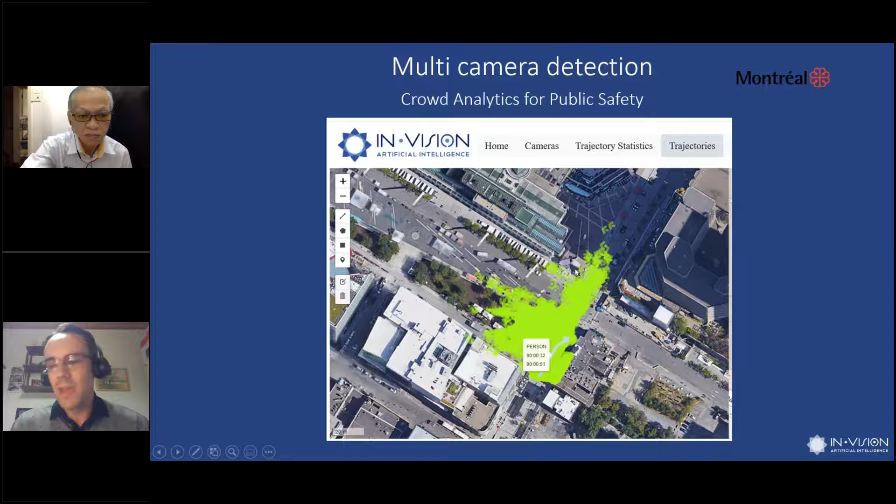We're also working on adding detection of face masks, for example, so that's great for public safety. And we're also detecting hazards in the future, like fire and things like that. That's a top view of the interface we're working on, so that gives us a heat map of where people are in that area, and we're developing the user interface. Just wanted to show you a little example.

Almost there. So the roadside unit, that's the first prototype. Now we have smaller versions, but basically it looks like that. It's taking basically a few views when we detect a vehicle. We have some infrared panels to help illuminate the people in the car.

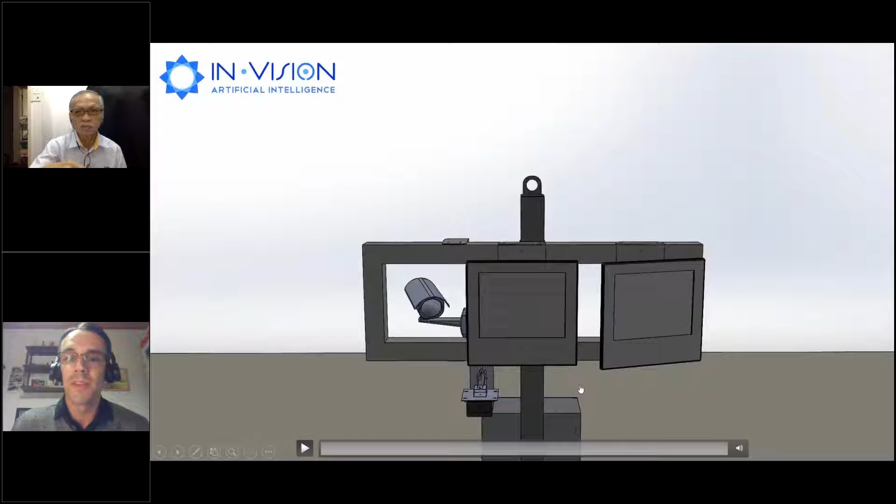And the way it works, I'll show you in this animation: we have a little LiDAR that detects the cars, IR and cameras. Hopefully you can see this little animation. The cars pass through, they're illuminated by the infrared, and we take some pictures.

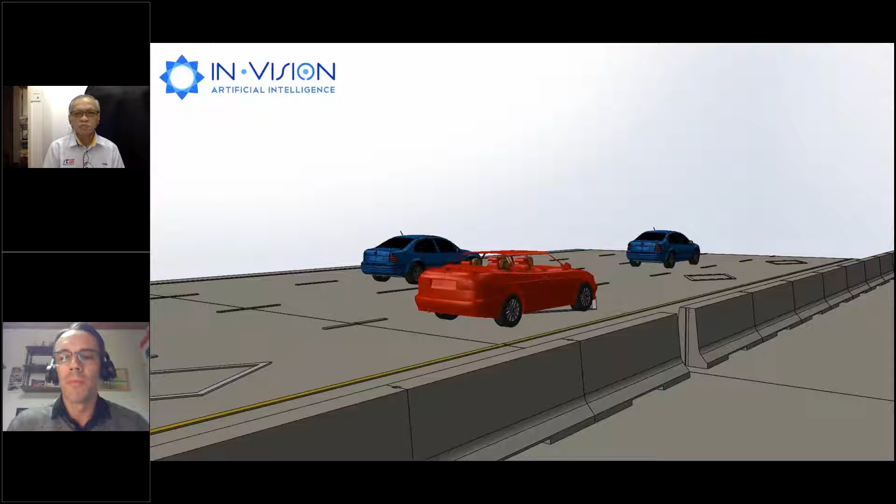That way we're able to count people using artificial intelligence and computer vision. We send statistics to the operator: number of vehicles per day, number of people per vehicle. We're also doing license plate recognition. That's not our product, but we combine it with ours and send all of this information in real time to the operator of the road, for example. So that's the last example.

Yeah, so just a little summary. We're leveraging artificial intelligence and computer vision.

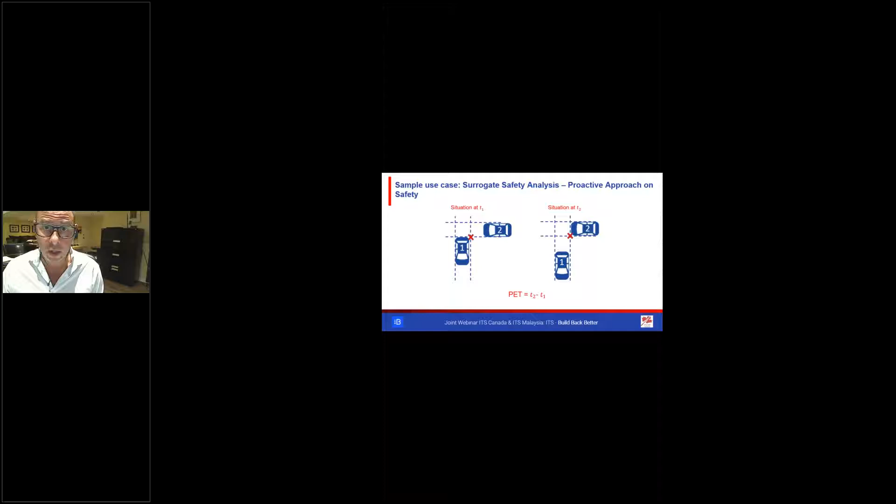It is highly correlated to the risk of accidents. PET values typically less than 2 seconds are classified as critical conflicts, and from 2 to 4 seconds as unsafe conflicts.

This slide is a screenshot of our online interactive heat map, which visualizes conflict data.

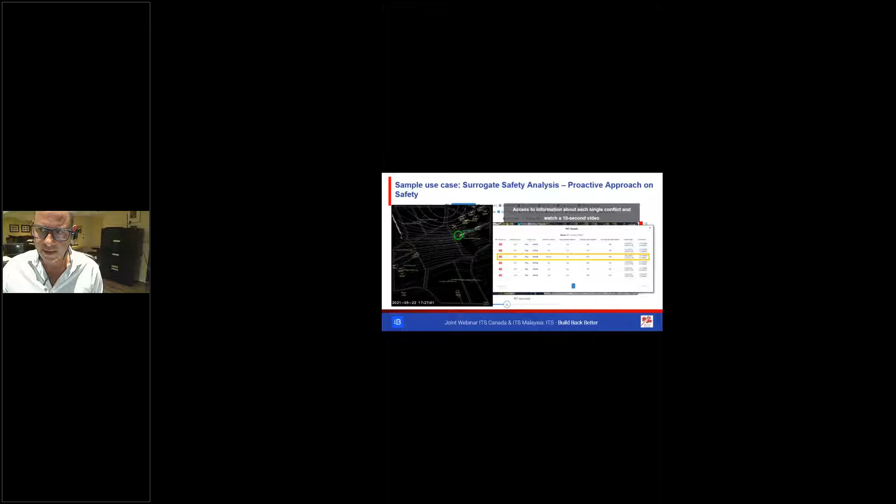Which visualizes conflict data. The user can filter the types of road users, filter the type of turning movements, and filter PET value. Once the filters are adjusted to the user specification, the associated conflicts on the map are represented, and the user can see a video, as you can see here on the left.

We are ready for the future. With 5G connectivity, edge computing, and open APIs, Bluecity has low latency, reliability, and flexibility for future and safe applications. I'll wrap it up there.

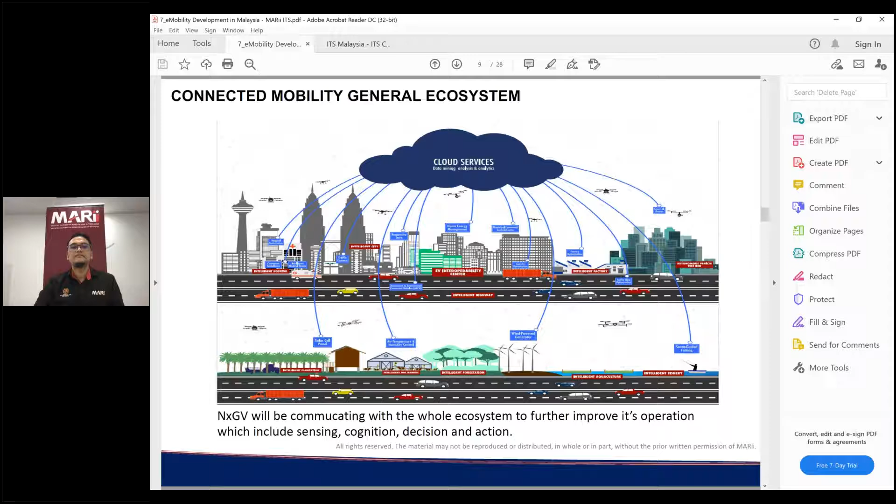What have we defined for NxGV? We have gazetted the Malaysia Standards 2730, the next generation vehicle standards, which is actually the adoption of SAE J3016 and also the World Forum for Harmonization of Vehicle Regulations WP29 guideline into our Malaysia standards.

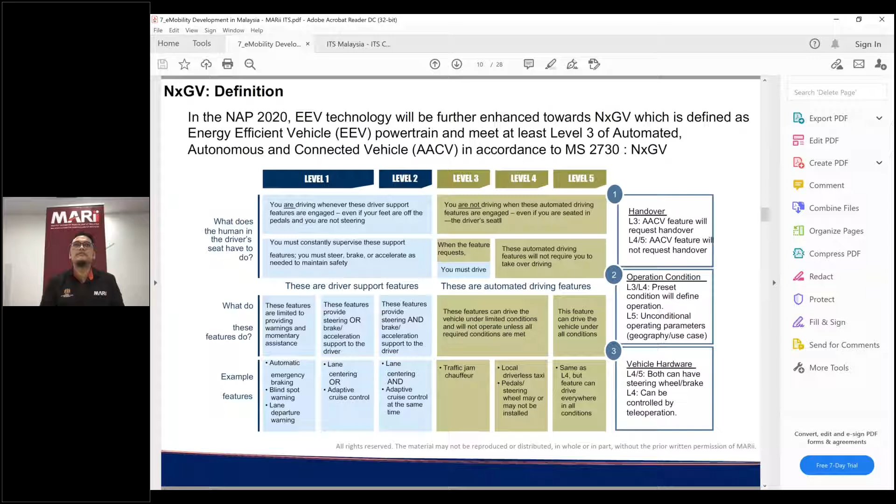In the National Automotive Policy, the energy efficient vehicle technology will be further enhanced towards the NxGV, which is defined as EEV powertrain and meeting at least level 3 of autonomous level. From level 3 onwards, the intervention of the driver is very minimal, and from level 4 onwards it will be fully autonomous vehicles.

This is the key technology development we are focusing on in Malaysia, which consists of the autonomous vehicle platform, the future sensor fusion solution, the data storage and computing, and also testing and validation.

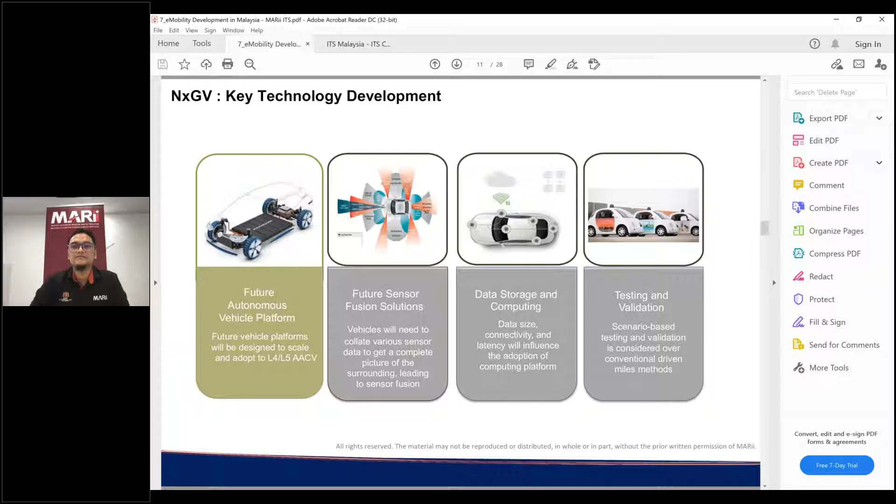To kick off with this technology, we start with the telematics or onboard diagnosis, which becomes the communication port for the vehicle to communicate with the surroundings, infrastructure, and environment. The telematics consists of three independent breakthroughs of modern technology, including the internet, the global positioning system, and also machine-to-machine communication.

This technology is widely used by transportation to deliver businesses and to send out large fleets of vehicles and products. Apart from tracking vehicles, telematics technology is also used for monitoring complete fleets of vehicles and driving behavior, including speeding, idling, fuel usage, and so on.

What we have done in Malaysia is get the primary data from vehicles, deploy pilot projects, and then process the data. We compute it and visualize it in the form of a dashboard, and then use it for development and reporting to the authorities.

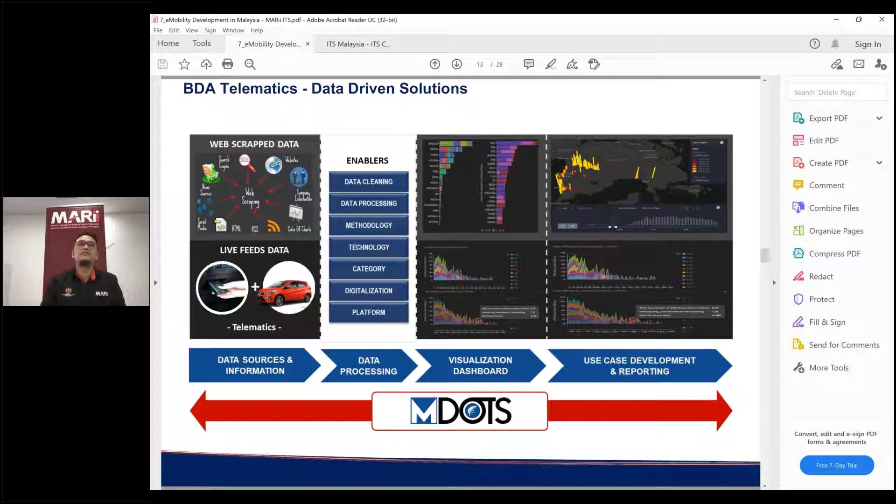I'm going to share the current development status for the electromobility ecosystem improvement in Malaysia.

To attract more investment in next generation vehicles, Industry 4.0, and the development of mobility as a service, the government is giving full exemption for import and excise duty for electric vehicles and hybrid cars. This is to promote powertrain ecosystem development. For investments related to intelligent transportation systems and the development of mobility as a service, we are also giving corporate tax exemption of up to 10 years, depending on the type of activities done by particular companies.

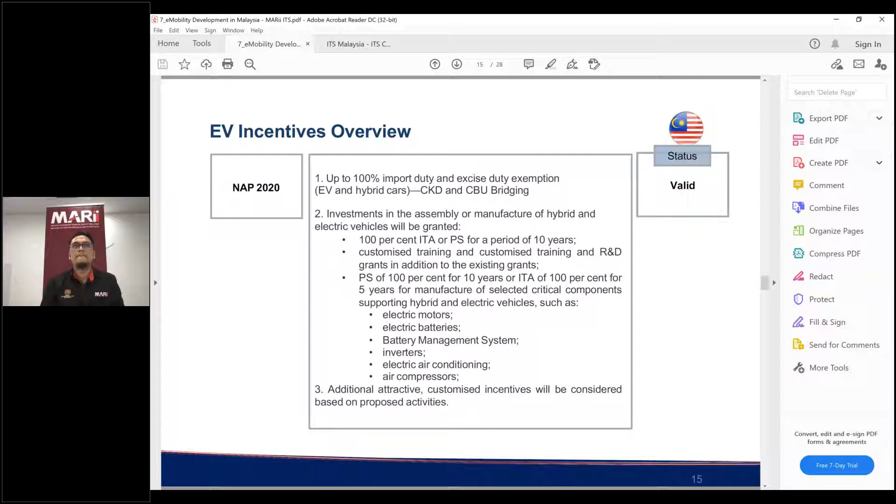Apart from that, we are also harmonizing our Malaysia standards development and domestic regulations by adopting United Nations regulations into our legislation, adopting ISO standards into our legislation, to make sure industry develops products in line with these standards and regulations. This includes requirements for the powertrain system, especially in terms of electric vehicles, battery testing, and so on.

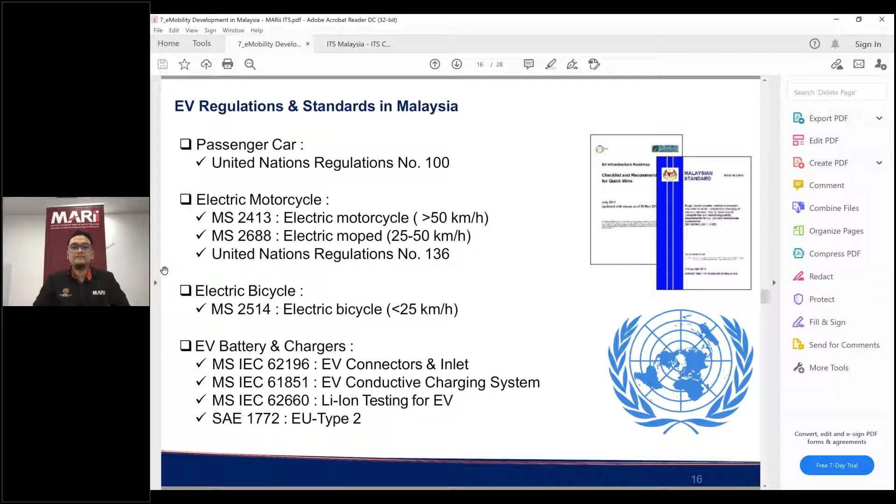For electric vehicle registration, we have recorded around 3,000 vehicles for year 2021, and for hybrid, more than 45,000 units were recorded. We have deployed a lot of electric vehicle pilot projects, including R&D projects under MARii, deployment in certain local authorities' areas such as Putrajaya and Melaka, and leasing projects launched since 2014, which will be expanded in 2020-21 to ensure the sharing concept and leasing mechanism can be realized for mobility as a service.

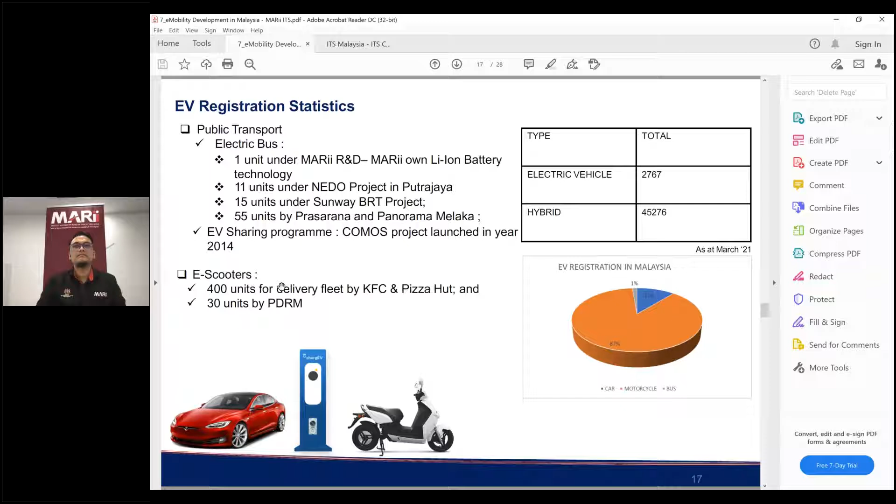This is the record of charging stations currently available in Malaysia. We have recorded more than 326 public EV charging stations, and currently it was recorded that more than 180,000 charging sessions have been leveraged using these public chargers, and it is estimated that more than 1 million kilograms of CO2 emissions have been avoided.

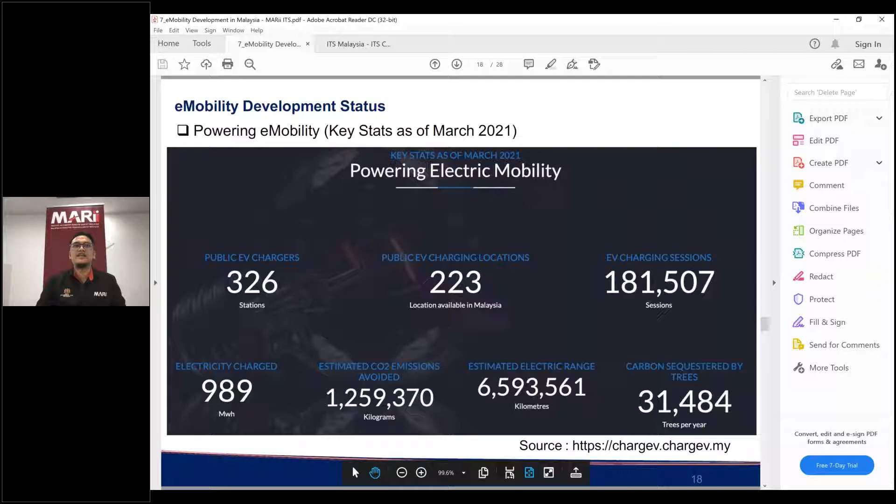As for the telematics project that become the communication port for vehicles in Malaysia, under MARii we have deployed more than 1,000 vehicles to collect data in terms of routes, and we have aggregated the data in terms of which areas have been more in terms of speeding alerts, harsh cornering, and harsh braking. We have compiled the data and given the input to the authorities to formulate better policies.

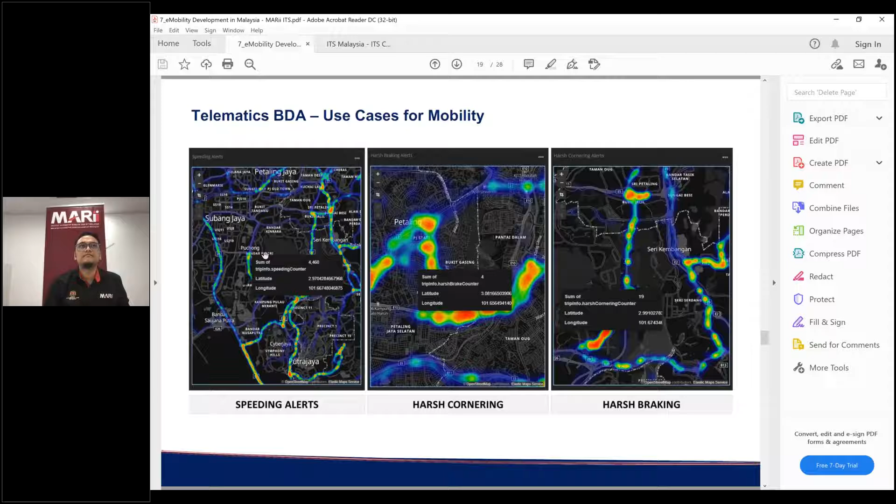We also have allowed autonomous vehicle mixed traffic testing, under the Ministry of Transport guideline with assistance from Futurise. So far we have allowed 2 different routes. The first route has a total distance of 800 meters, with AV trial allowed up to 20 kilometers per hour, focused on parking areas with minimal pedestrian presence. The second route has a total distance of 6.25 kilometers, with speed limit up to 40 kilometers per hour, comprising intersections, road humps, zebra crossings, and traffic lights, under normal free-flow traffic conditions.

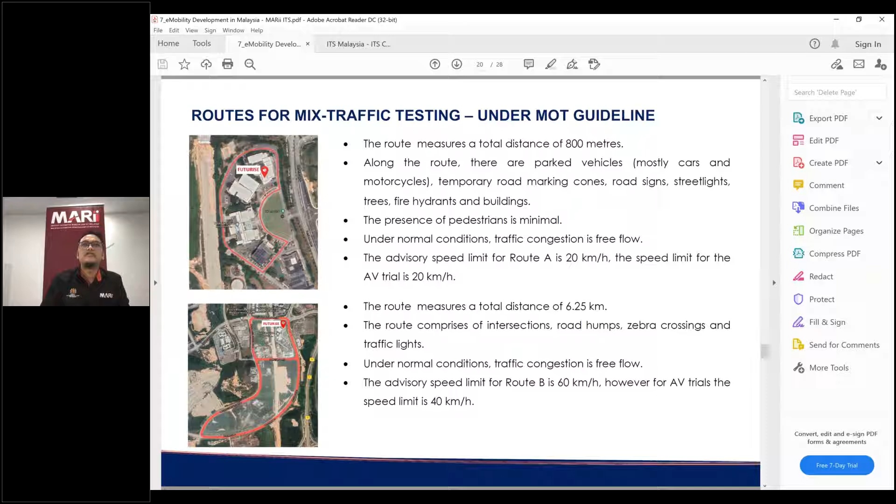So to move forward, we also have strategized the action plan to make sure of continuous expansion and improvement for e-mobility in Malaysia.

The first project is the proof of value concept by localizing the next generation vehicle in Malaysia. Under MARii now, we are developing our own autonomous level 3 technology. We have acquired several LiDAR units and onboard computing for the vehicles, to make sure we can perform our own global positioning system, embed the sensory, safety, control unit, and processing drive unit. We aim to introduce low-cost autonomous vehicles in Malaysia to attract more market penetration.

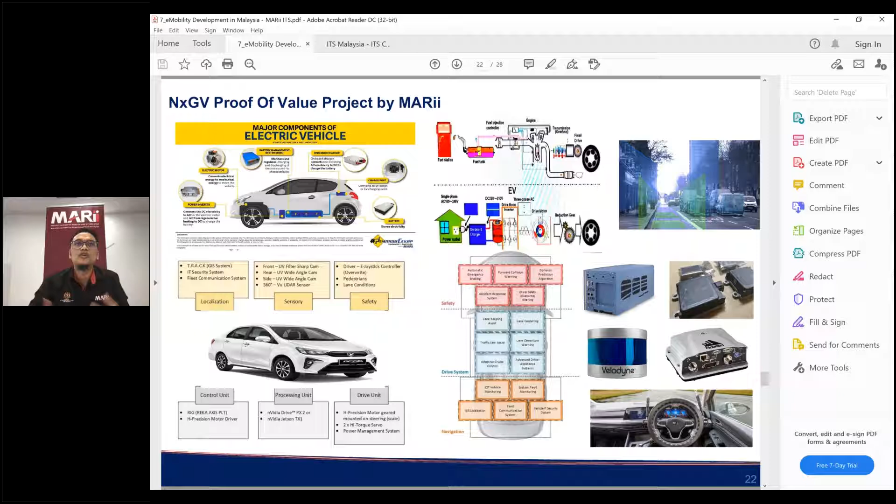This is the phases of development we are currently doing. We start with design of the hardware, electronics, schematics, fabrication, firmware development, as well as communication module hardware interface. We have developed our own microcontroller to be embedded into the next generation vehicle as the integrator across the whole hardware, to make sure we can deploy the next generation vehicle with autonomous level 3 functions.

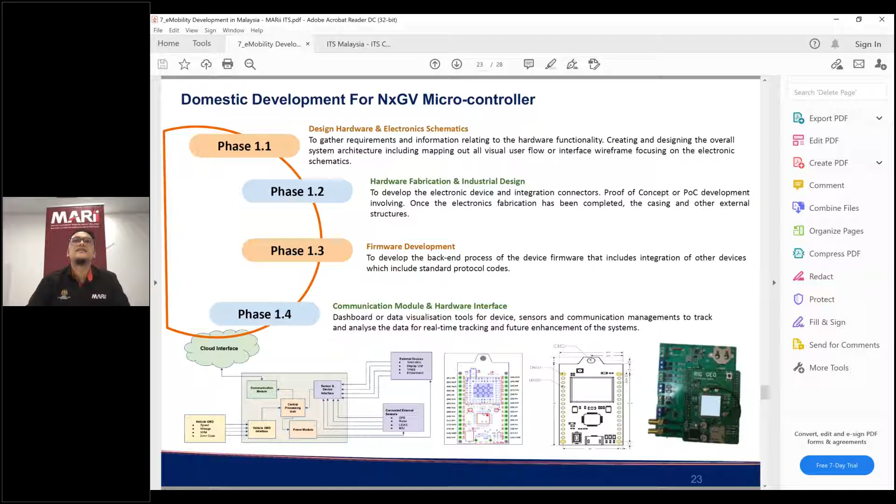Apart from that, we also are working with the Ministry of Transport to expand the mixed traffic routes. Apart from Cyberjaya, we are strategizing to make Putrajaya and Johor test fields. For Putrajaya, the routes will be around 2.7 kilometers with a limit of 20 kilometer per hour operation, and a second route of 12 kilometers with a 40 kilometer per hour speed limit. For Iskandar Puteri Johor, the routes will be around 5 and 20 kilometers, with speed limits of 20 and 40 kilometers per hour respectively.

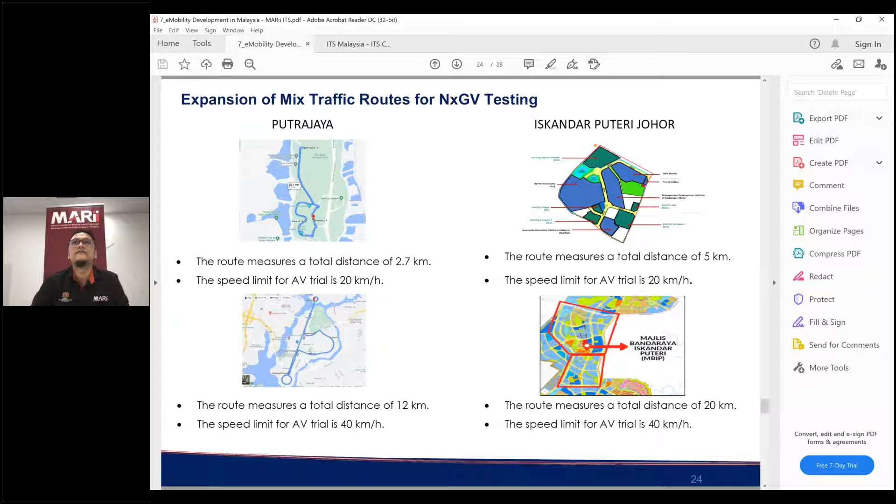Shahrul, you have only 1 minute left. Shahrul, 1 more minute. Right.

Under MARii we will also be developing the next generation vehicle testbed, to ensure the safety validation and full function testing of the next generation vehicles.

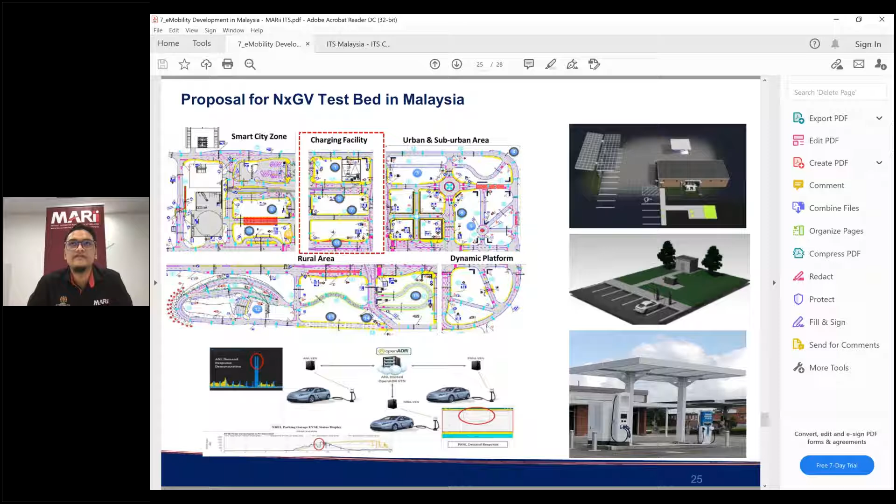We have strategized so that all the deployed vehicles, established test fields, and proving grounds will be integrated to enable the V2I ecosystem. The EVIC will be able to perform testing of vehicle grid interoperability, cybersecurity, and ensure safety and communication.

Lastly, this will be the vehicle to infrastructure ecosystem that has been envisioned under the National Automotive Policy. With the establishment of the V2I ecosystem, we are expecting to formulate better policies and ensure the connected ecosystem mobility can be realized by year 2030. With that, I would like to end my presentation. Thank you very much.

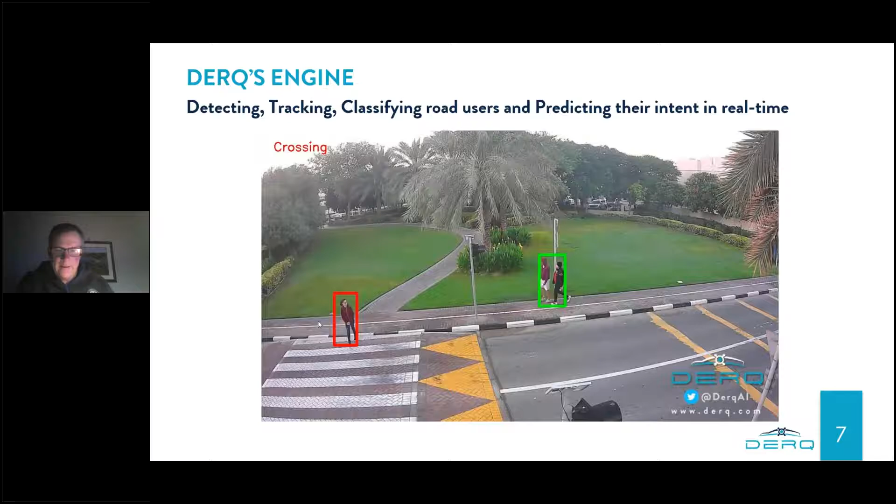Whether it's a connected vehicle or a rapid flashing beacon, there's a lot of different things we can do with that data. There's also a number of different things we're doing in terms of prediction and intent, not just looking at head turns, direction and velocity, but over a dozen different algorithms we're using to predict that intent, with the goal of adding seconds back into the equation to ultimately help avoid that collision altogether.

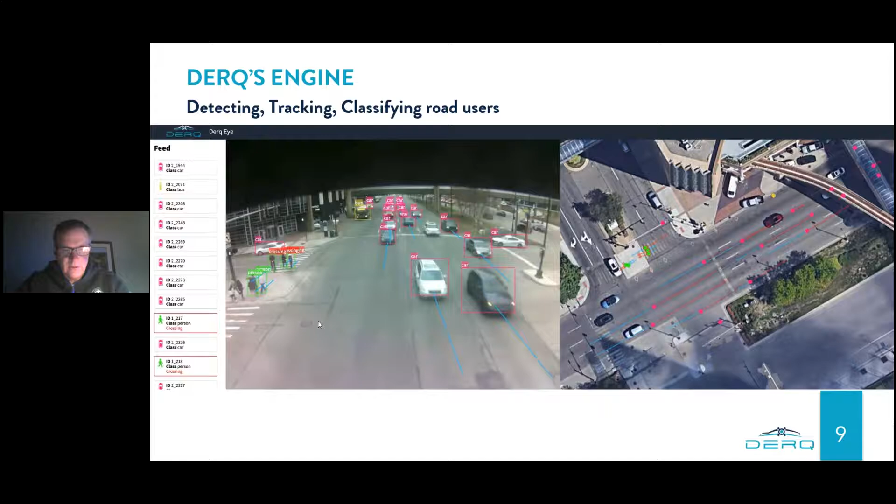As we take it to a larger intersection, you're seeing the detection and prediction of vulnerable road users, classification of vehicles, path history, and path prediction on the right from a top view, just seeing how it all comes together. So this is used for both.

Video detection analytics capabilities - if there's radar, LiDAR, those kinds of things, we're doing that as well. But video tends to be all-encompassing, and most applications fall into that. On the right, you can see what's happening with the path prediction and those kinds of things.

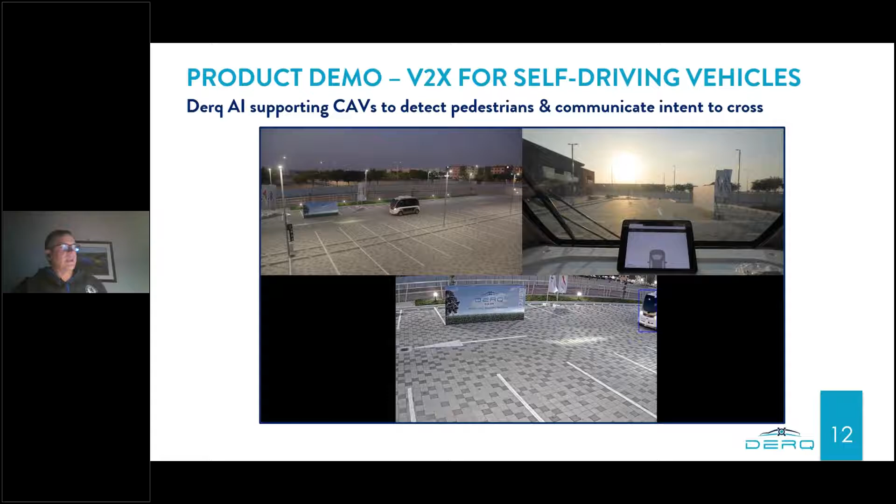They only go 10 or 12 miles an hour. When those autonomous shuttles have to stop abruptly, even at that low speed, people can still get thrown around inside the shuttle. By the shuttle using the infrastructure as a redundant safety system to the onboard systems, it'll actually come to a more gradual stop.

Users have a much more comfortable ride, and it also allows autonomous shuttles to start going faster - instead of only 10 or 12 miles an hour, they can start looking at going 20, 25 miles an hour and faster.

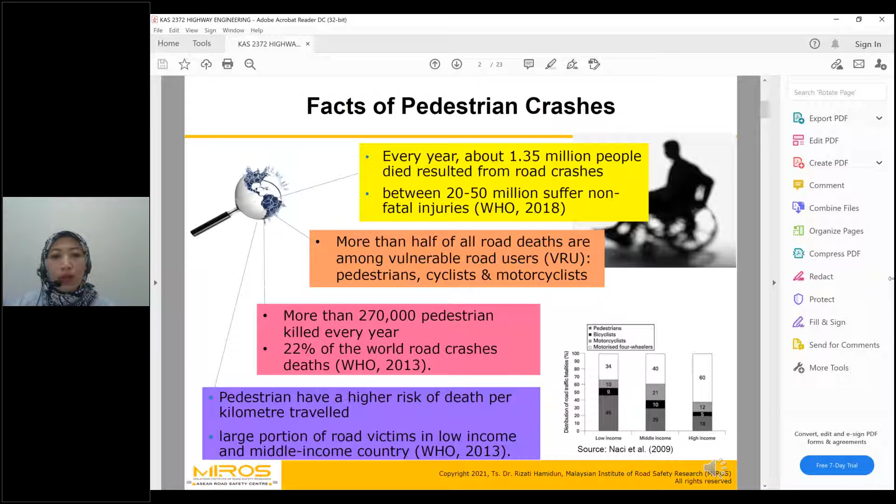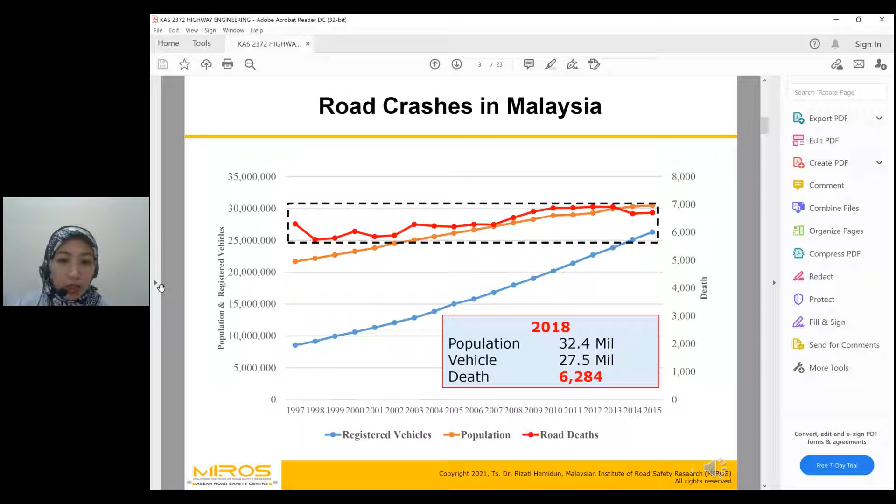With an average of 6,000 deaths per year, this is equivalent to 20 jumbo jet crashes per year, or 17 road users dying every day in Malaysia.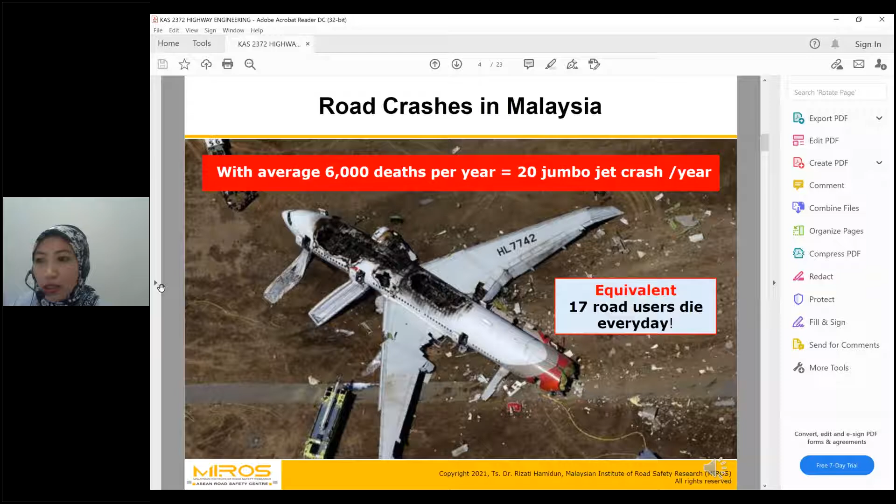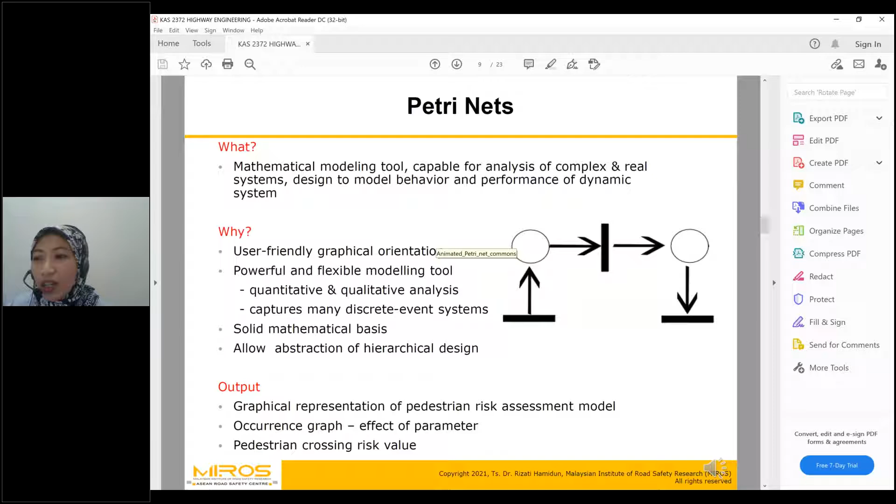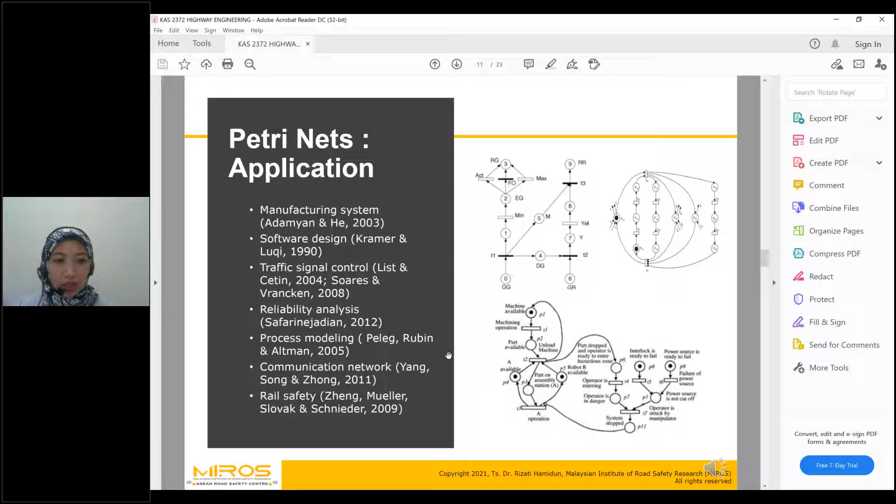The third stage is model development, where the chain of event in Petri Net structure was established, and this must comply with Petri Net properties, otherwise a deadlock condition appears. The model needs to be calibrated and validated. Once all steps are accomplished, the output is the pedestrian crossing risk assessment model, or PedCRA model, which can be used to estimate the crossing risk of pedestrians at signalized intersections in Kuala Lumpur.

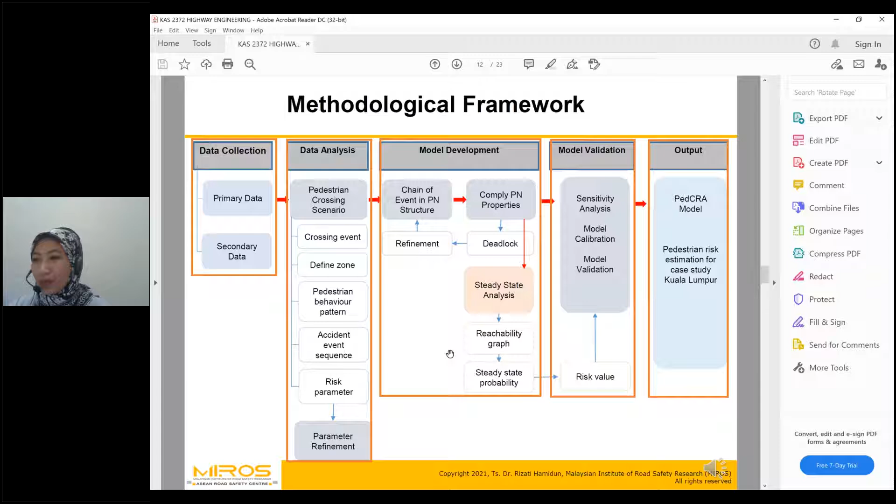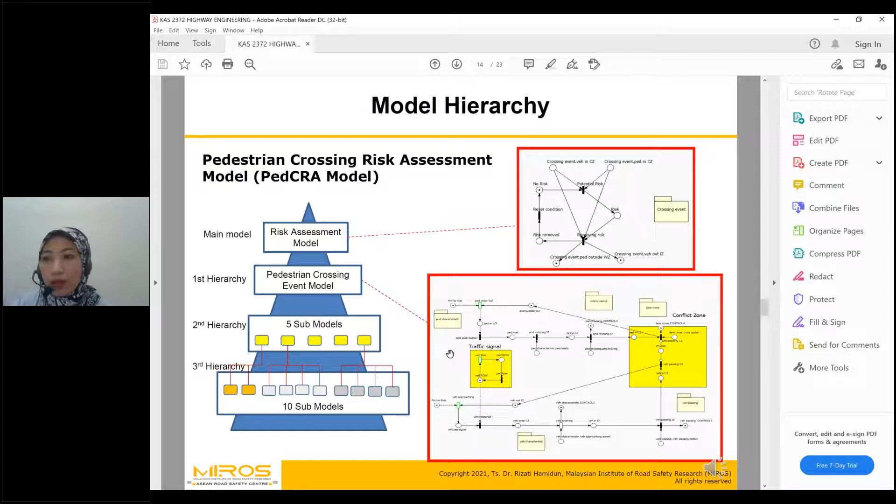Under the first hierarchy model, there are 5 submodels that take into account the risk factors to pedestrian crashes at signalized intersections, which include the pedestrian characteristic, pedestrian crossing behavior, vehicle characteristic, vehicle passing behavior, and also the road characteristic, called the lane cross submodel.

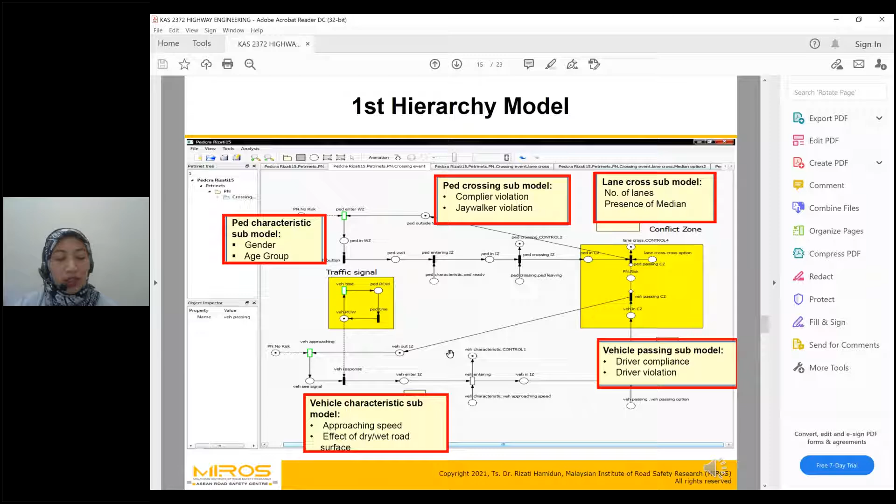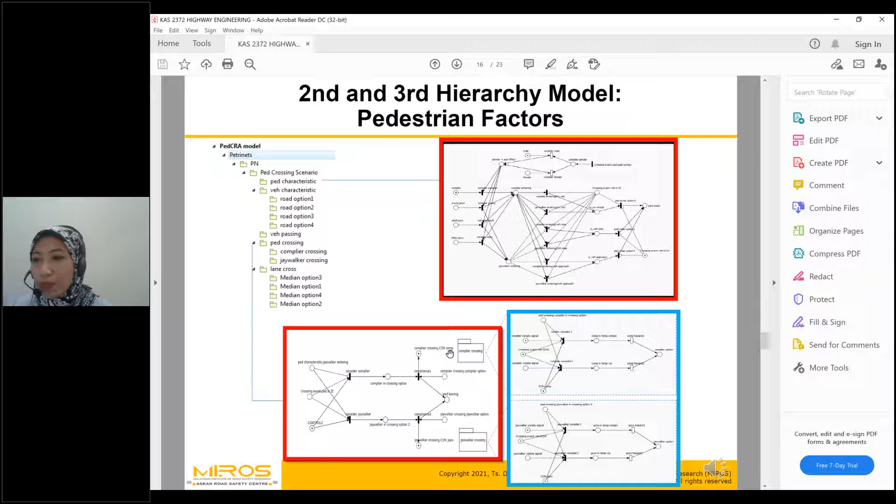A similar approach is used for the submodel that considers the vehicle factor. The submodels under the second hierarchy model are called vehicle characteristic and vehicle passing. Under vehicle characteristic, there are 4 submodels that lead under the third hierarchy model.

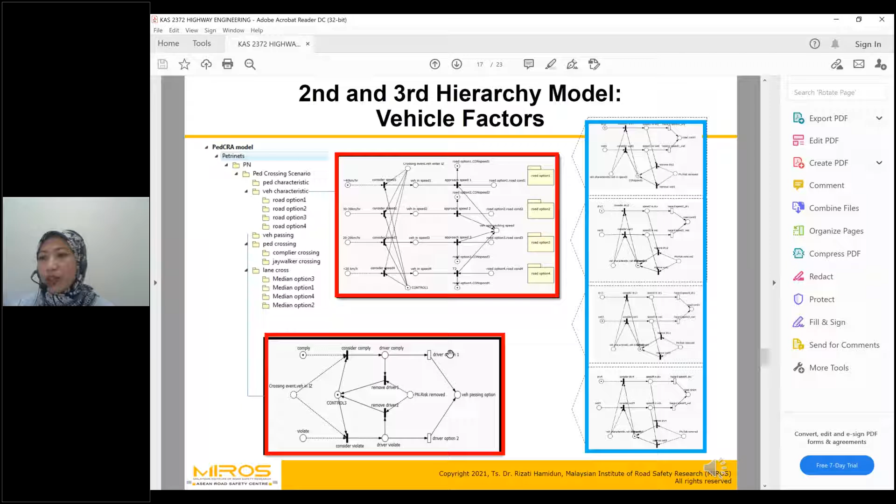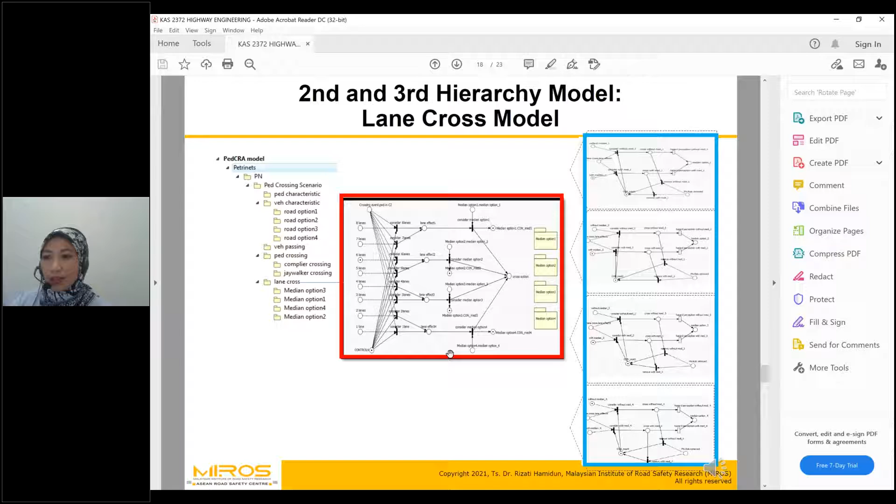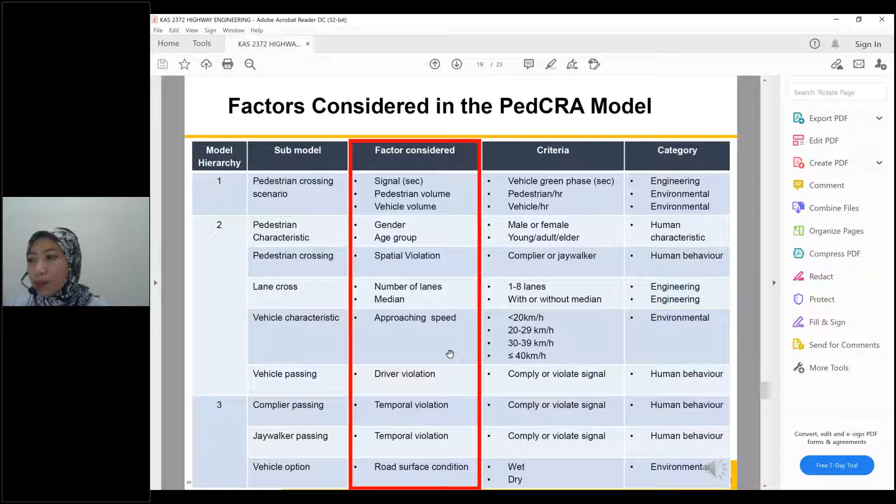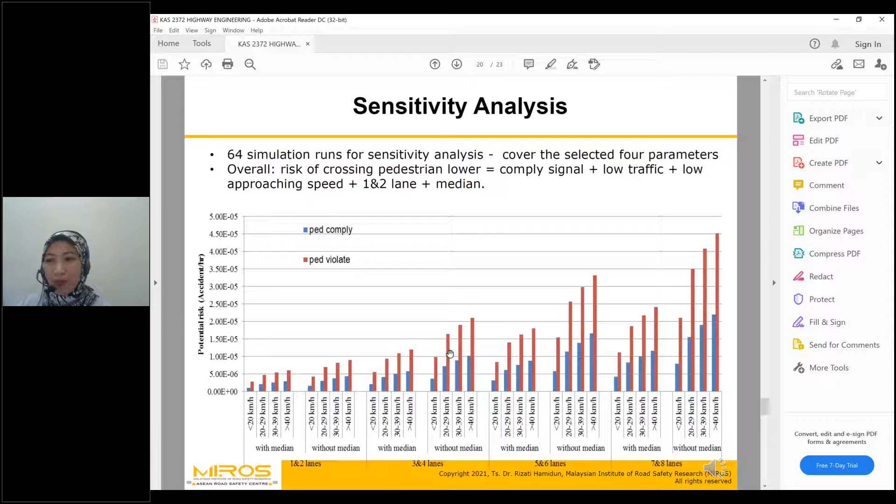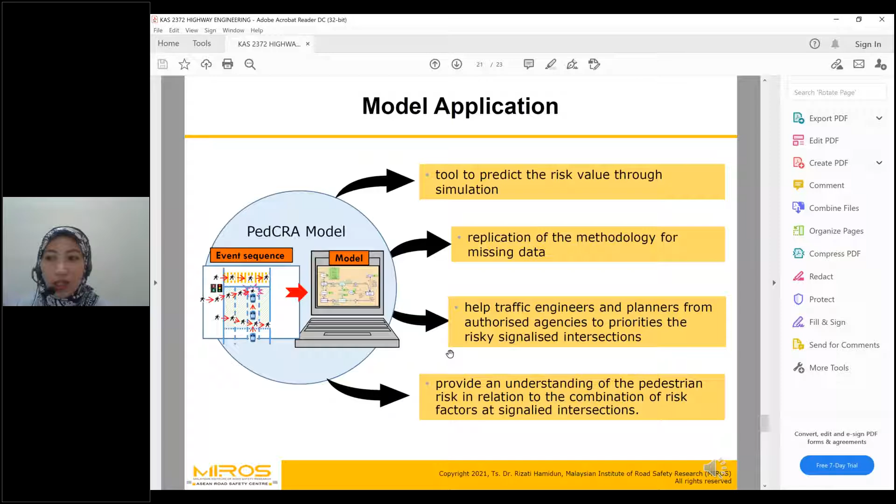The results drawn from the analysis of this study are expected to provide an understanding of the pedestrian risk in relation to the combination of risk factors at signalized intersections.

For generating the risk of pedestrians at signalized intersections in Kuala Lumpur, data from SCATS can be used, such as the vehicle volume, the number of lanes, the green time, while data on pedestrian volume and behavior and vehicle speed can be obtained through site observation or extracted from CCTV. Additional accident data may be needed for model validation.